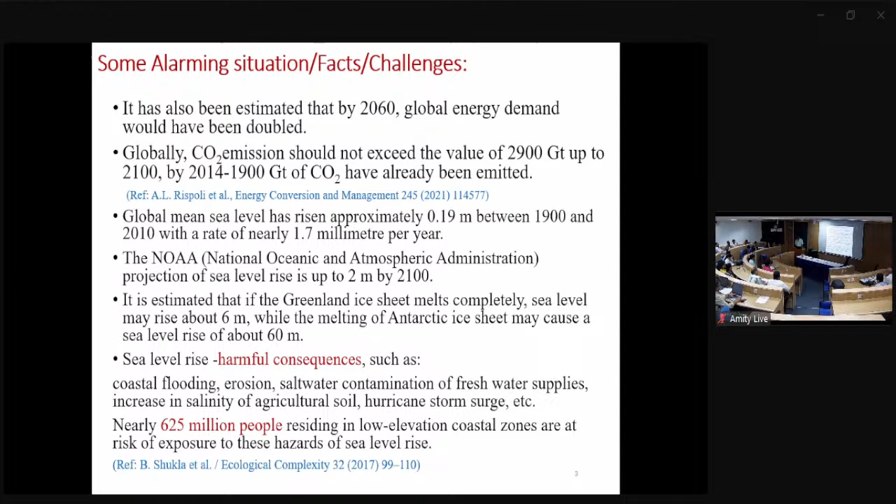This is a very dangerous condition we can face in the coming years because of global warming, and that is only due to our activity where we are emitting this CO2. What is the solution to it?

So please tell me if 30 minutes will be there. Okay.

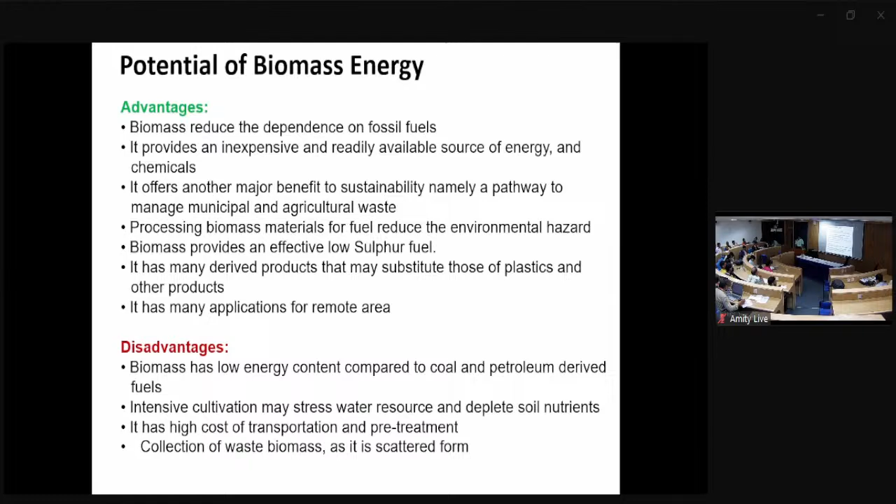So that base is the thermochemical conversion system. So my topic is on gasification. We are not going into hydrothermal liquefaction or pyrolysis. So here what we receive from gasification is called producer gas, and if it is filtered and some impurities are taken out, then this is called syngas.

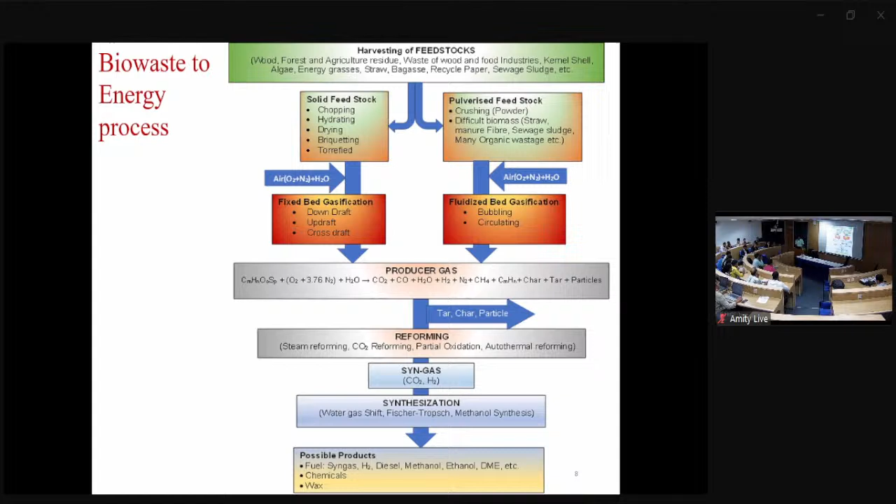So each type of biomass we cannot use. Certain qualities are required. Biomass which has cellulose and hemicellulose content will be beneficial for gasification. So these are the different temperatures. You have to achieve particular temperatures, then only gasification can happen and it will produce the producer gas, otherwise it will burn completely. And there must be certain agents like oxygen, CO2 or steam, and these should be in limited conditions.

So the basic problem of gasification is that on one part heat is required, and partial combustion is also required, where oxygen is in a limited portion. So this achievement is very challenging for the different types of biomass.

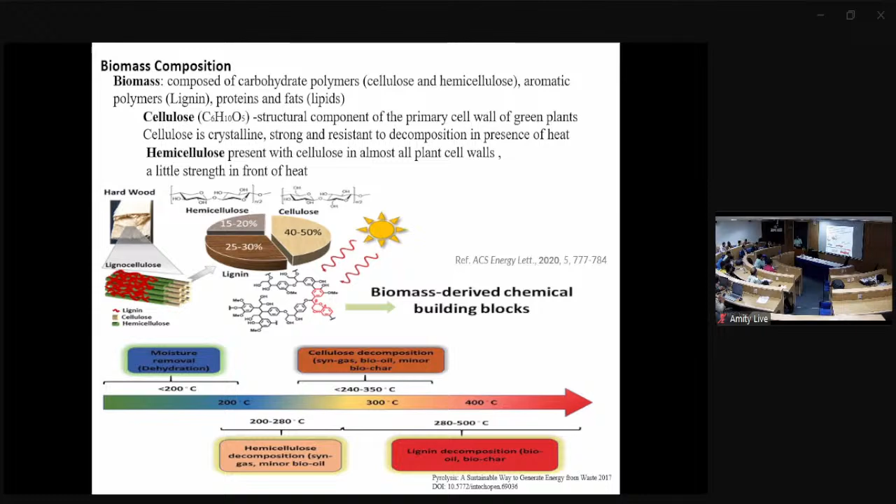For example, a simple leaf coming from the tree has very little volatile matter. So we cannot use it in gasification. But blended with others, it can be utilized.

So this is the basic mechanism of gasification, where heat is taken as an input, and different other gases come when pyrolysis has taken place, and finally CO, CO2, H2O, H2 and CH4, such chemicals as fuel, come out from the gasification.

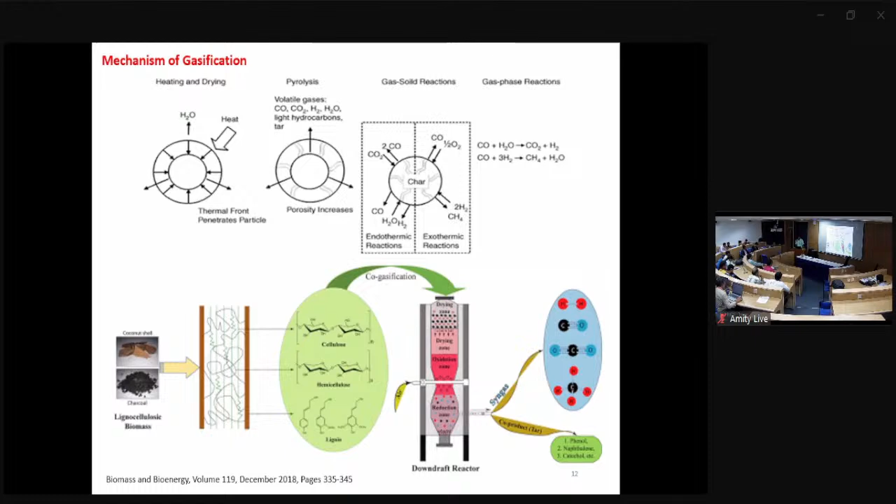And this is the basic chemical structure and the different heat zones in the gasification system. When the material is fed from the upper side, the total gasification system comes under different zones: drying zone, then pyrolysis zone, then oxidation zone, then the reduction zone. The reduction zone basically converts the pyrolyzed fuels into different gaseous forms.

So these are the different reactions. I'm not going into details upon it. Combustion with oxygen, combustion with carbon dioxide, steam reforming, then hydrogen, then water gas shift reactions, and methanation reactions. All these reactions happen inside the gasifier.

These are the different gasifiers: updraft gasifier, downdraft gasifier, circulating type or entrained type gasification systems, as per the requirement and as per the efficiencies concerned.

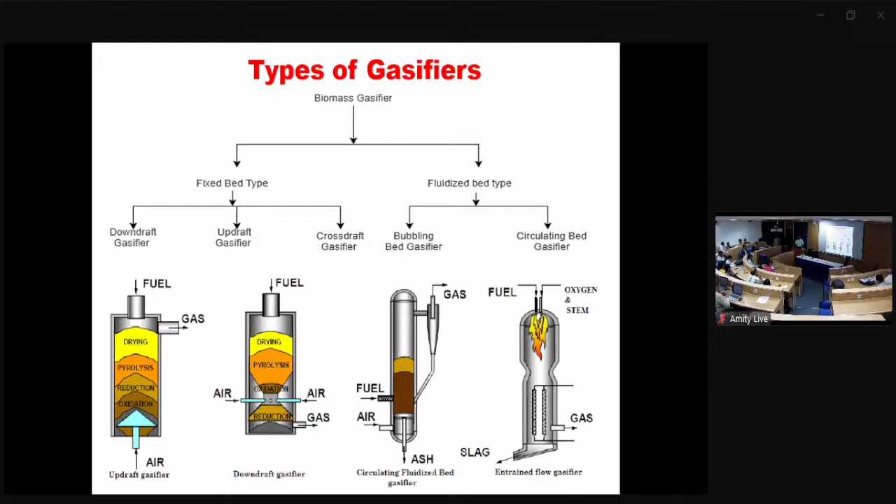The compositions, what are the different compositions that come out corresponding to the different types of gasifier. Gas quality is important - basically when we are going to use it in the engine, then the tar should be very less.

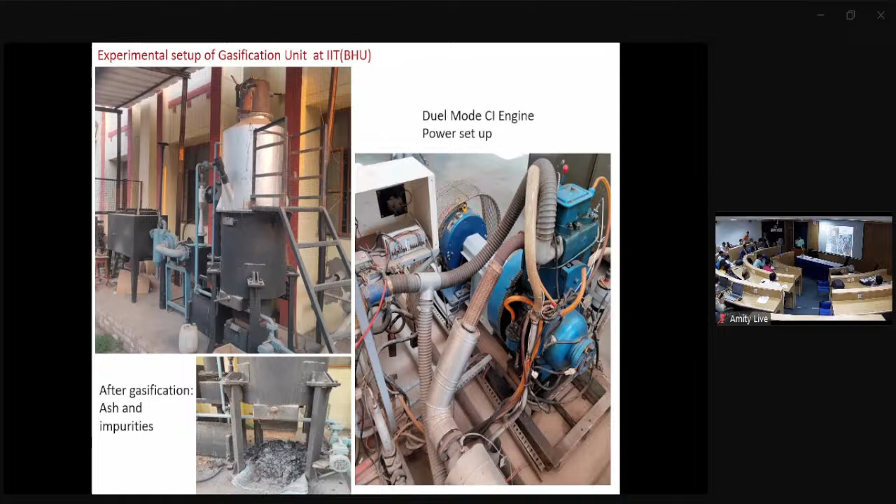First of all, gases we can use in the internal combustion engine. Charcoal - this is very much beneficial for heating purposes, and this is basically smokeless coal or smokeless wood. Another byproduct is ash particles, and this ash can replace nearby 10% of the cement. So this is what we have achieved.

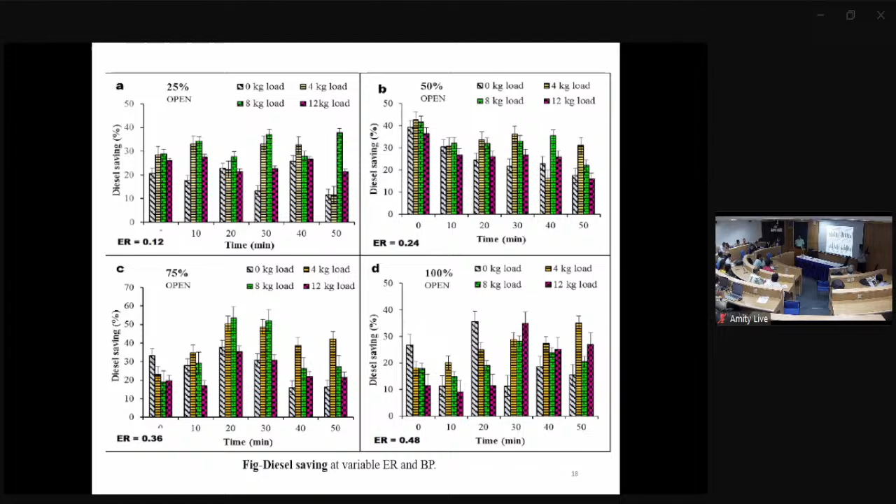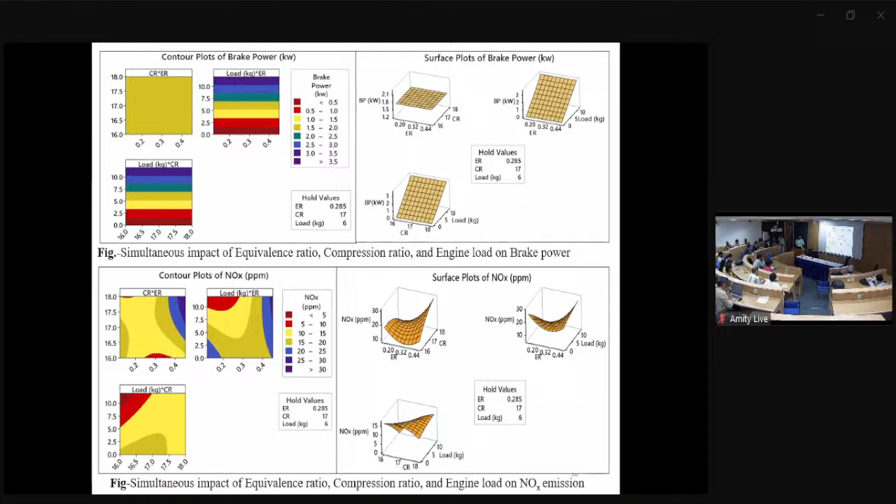These are certain results in terms of brake power and emission level, and we found the NOx emission is also very low, which is very important for saving our environment. For different compression ratios in engines, we experimented and found that at 18 compression ratio, we reached nearby 49.05% diesel saving - basically 50% diesel saved.

These are the different heat balance charts, and we found the optimum conditions of the equivalence ratio in terms of gasification, similar to the emissions from an engine, and corresponding to maximizing power, we received an optimized point shown in red - that is 0.12 equivalence ratio and nearby 17 compression ratio, with load maximized.

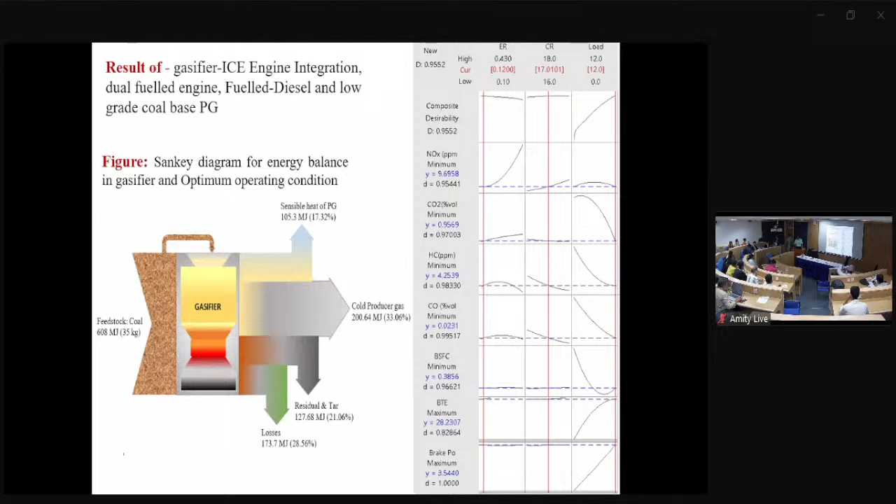Similar results are there in terms of brake power, indicated power, and NOx emissions - the similar results we received are also very beneficial in terms of fuel consumption. So this is a new design that we are working on.

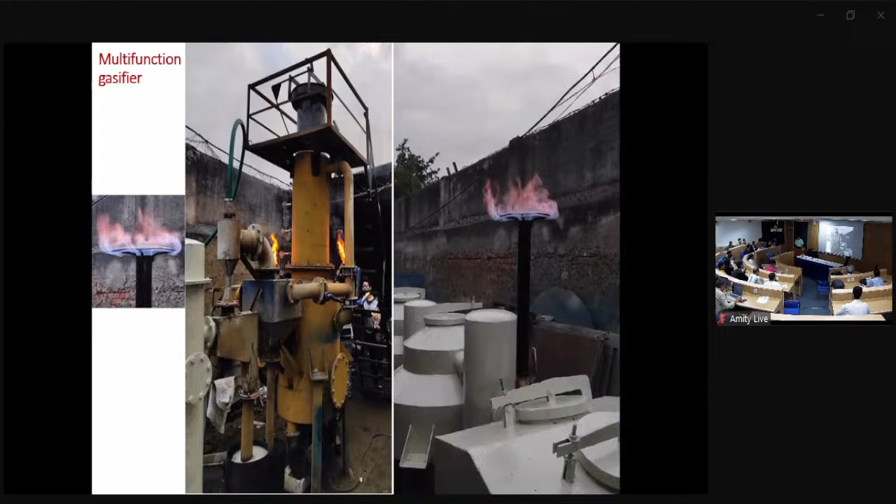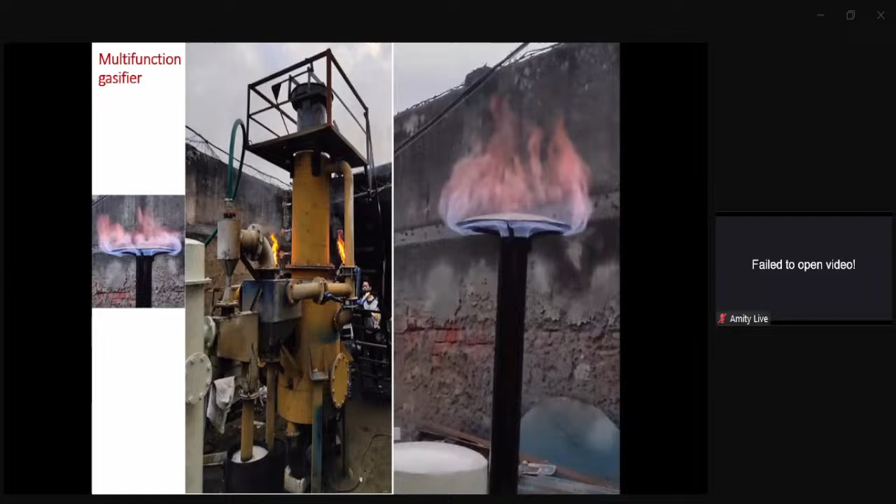Yes, basically in the gasification system, there is no waste. First of all, from the biomass, we are taking out gases.

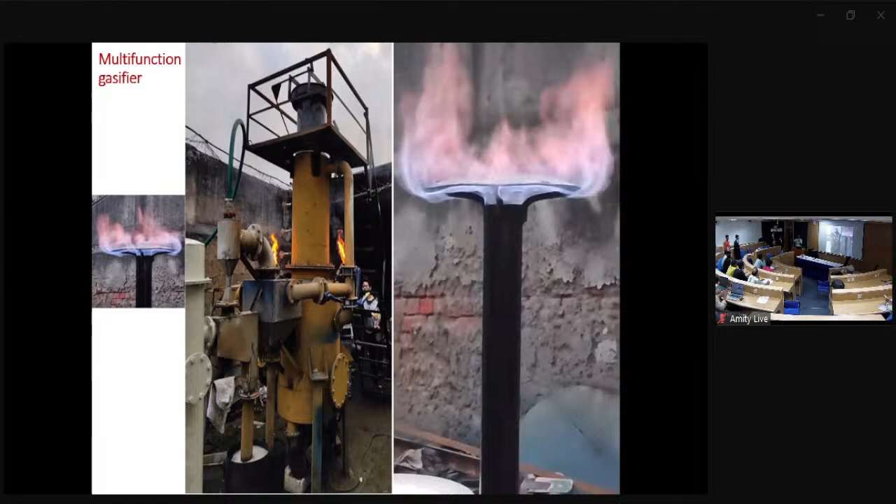So there is no waste. So this is green technology.

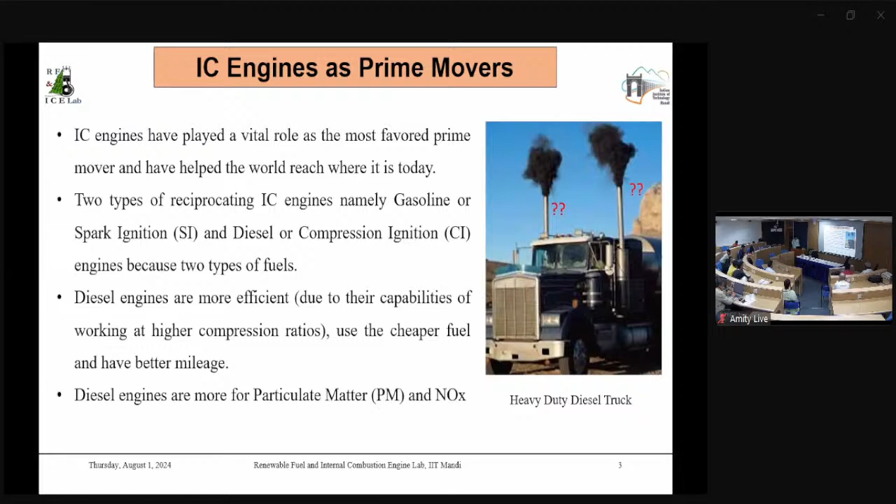So we have to make an effort to shift to clean energy sources, especially for the convenience we are deriving from mobility sources. We have to face the consequences, because for automobiles, these pollutants come in contact with a big population. But for other sources like power plants, we may have the luxury that we can emit in sparsely populated areas and discharge in the upper portion of the atmosphere. But for automobiles, it has to be ultra clean.

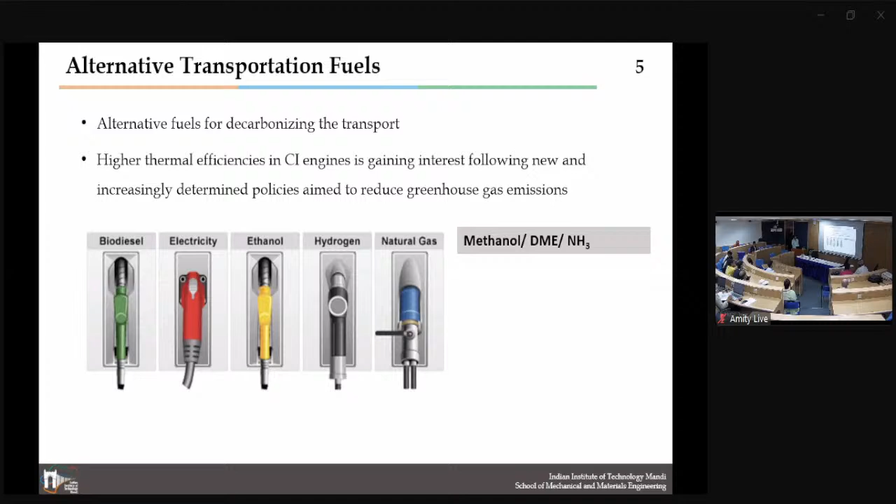And hydrogen, of course there are many demonstration projects, but there are questions about long-term supply and storage issues. And then there are some future fuels like methanol, DME, and NH3 that we are targeting as a strategic mix for powering our transport.

So in the volume and weight that power sources like hydrogen and large scale electric vehicle battery storage are going to occupy, they have the same level of energy storage density. That is the major reason that in the data, the penetration of EVs in commercial and bigger vehicles is almost zero. But of course, we see some positivity for electric vehicle based alternate transport in terms of smaller vehicles.

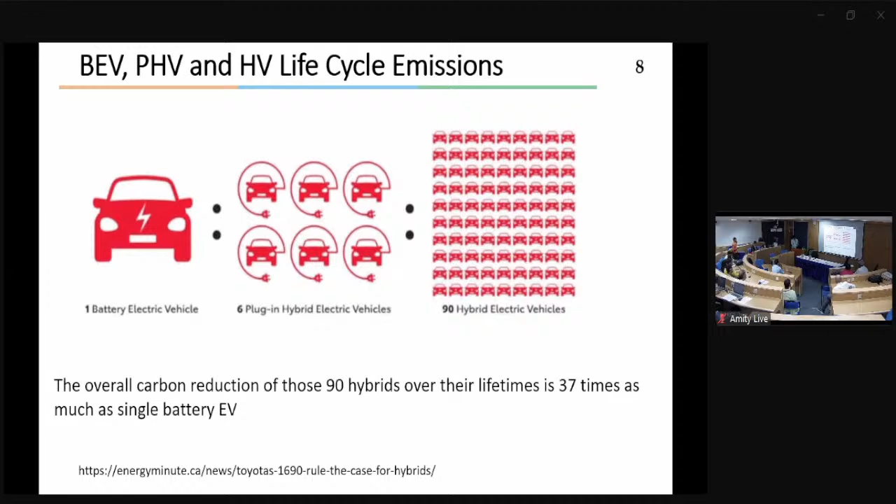And if we have to strategically plan the alternate transport scenario, there are some studies which show that hybrid vehicles are going to be the greenest strategy compared to 100% electricity. But in the interest of time, I will not discuss that in much detail. So then coming to the original issue. There is also equal promise for hydrogen based powering of the transport sector, but the supply situation is not very promising for hydrogen. So as an intermediate transition strategy, as a bridging strategy, what advantages we can derive from H2 diesel dual fuel engines, that I am going to discuss.

So these data show what happens if an engine is operated with up to 30% hydrogen energy substitution and the rest of the energy coming from diesel. What is the effect on in-cylinder pressure as a causal parameter, and then what is the effect on emissions and performance, that I will quickly show.

So it shows that if an engine designed for diesel substitutes up to 30% hydrogen, and for NOx mitigation 10% exhaust gas is also supplied along with the intake air, then bigger fluctuations are observed in the peak pressure compared to diesel-only application.

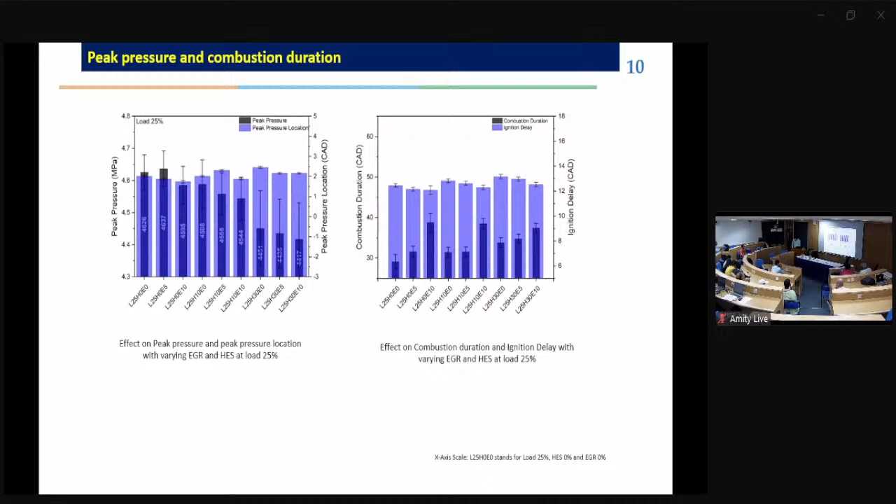So what is the effect of this small fluctuation in cylinder pressure? For any powertrain, we are sensitive to the vibration experienced on the engine, which is ultimately transmitted to the user as more or less vibration felt while riding the vehicle. So it makes sense to quantify the effect of the change of fuel on the vibrations produced on the powertrain.

By this differential method, the effect of hydrogen substitution in the diesel engine was measured. It shows a small vibration increment when putting 30% hydrogen at 100% load compared to diesel-only operation.

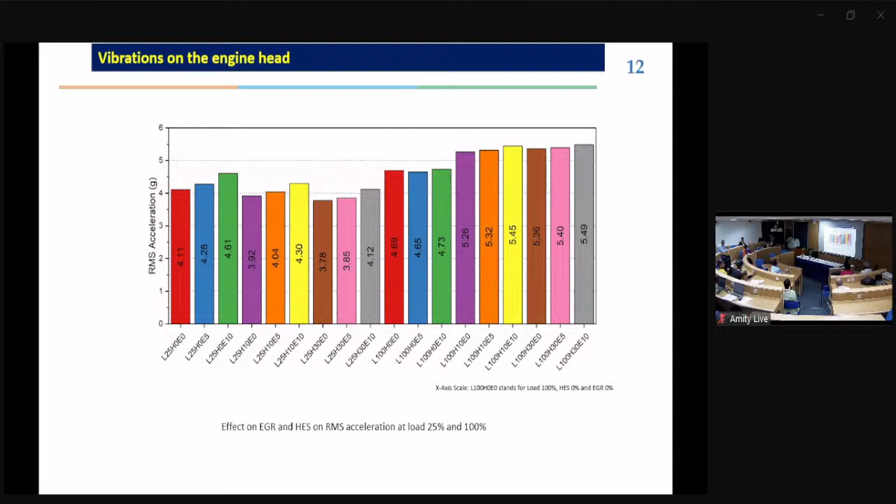So in terms of fluctuations in peak pressure and the associated vibration increase, at least these two challenges we have identified. That's why we need to identify the maximum portion of hydrogen substitution that produces a tolerable effect. Based on the peak pressure coefficient of variation, 20% or 30% substitution appeared acceptable.

Next was to see the effect of this hydrogen substitution on major pollutants. To interpret these studies: in the best case, if we substituted 30% diesel with 30% hydrogen, then more than 30% reduction in pollutants would show a synergistic effect beyond just material substitution of fossil fuel with pure hydrogen. So it's better to interpret the cumulative effect on various pollutants.

In a well-optimized strategy, there was about 35% reduction in NOx with the synergy of hydrogen and substitution of some exhaust gas. But because this engine was designed for diesel-only operation, 30% hydrogen substitution resulted in only 21% reduction in CO2, showing further scope for optimizing the engine for diesel-hydrogen mixtures. CO reduction was almost 30%, actual value 27%.

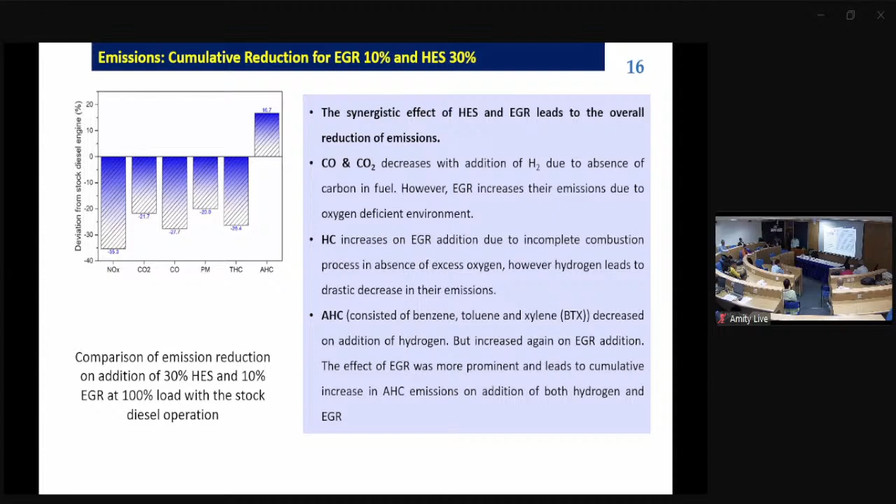So while seeing some pollution-related advantages from this co-substitution, the next thing is, as we know there are significant challenges in generating hydrogen. What is the possibility of onboard generation of a small amount of hydrogen through exhaust heat recovery on the vehicle itself? I will quickly show a few options for exhaust heat recovery and the strategies required for converting at least a fraction of that recovered heat into hydrogen.

Generally for automobile application, three routes are most prominent. The first is the turbo generator, meaning an extra turbocharger needs to be put apart from the one compressing the intake air. The second route is the thermoelectric generator.

So on the exhaust line, specific materials which, when subjected to a thermal gradient, produce electricity. If they are put on the exhaust line and the outer surface is properly cooled, then we can generate some small amount of electricity.

And the third route is suited for bigger vehicles like trucks and locomotive applications. There we can afford to install an even more complex system named an organic Rankine cycle based system. Among these three systems, system complexity keeps on increasing as we move from the turbo generator to the organic Rankine cycle, but in the same proportion their typical efficiencies also keep on increasing.

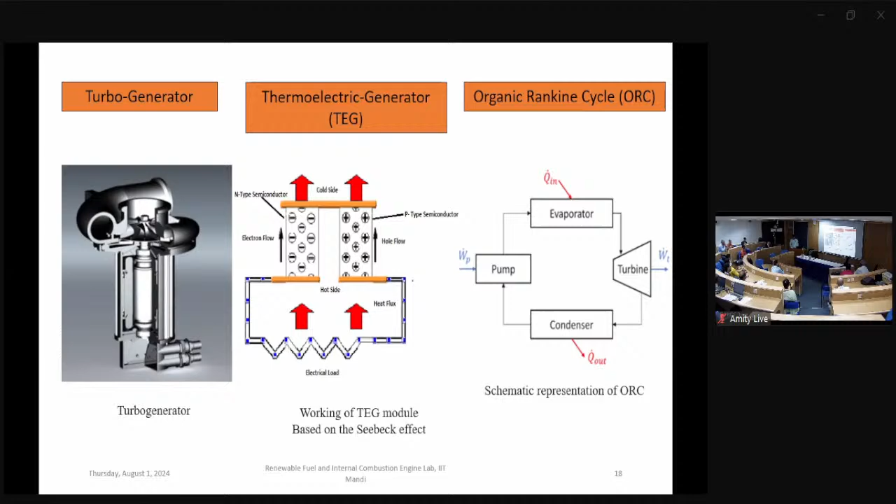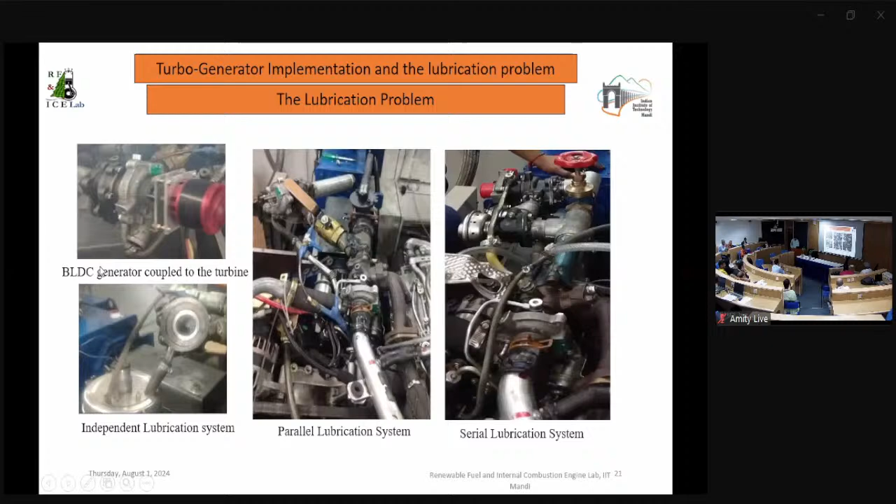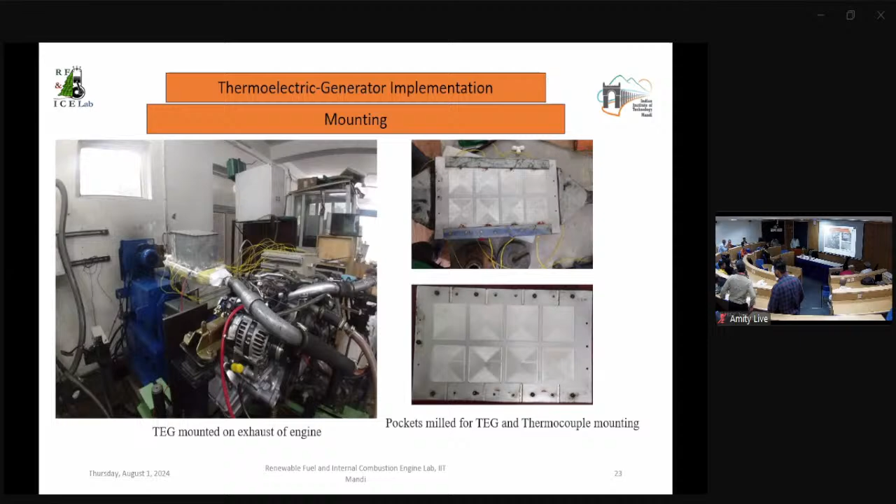So then quickly I will also mention the prototyping effort of the thermoelectric generator based implementation. Some muffler-like heat exchanger arrangement needs to be installed in the exhaust line, and these thermoelectric generators need to be provided heat absorbing surfaces, and as I was mentioning, the temperature gradient is the source of electricity production in the thermoelectric generator. So the other surface needs to be cooled. For reliable cooling, we need to either flow some liquid, or we can have some PCM based temperature control.

So it is showing the actual installation of that component in the left side diagram, and here it shows that because there are multiple small units of thermoelectric generator, for any meaningful power collection, some electrical circuit needs to be designed to feed the power from multiple small generators.

In this case, because the system is simpler, it was deployed for a longer duration, and the power output was measured by drawing the current. This prototype was able to generate up to 50 watts, and this shows that if this system can be scaled up, it can generate a significant amount of hydrogen.

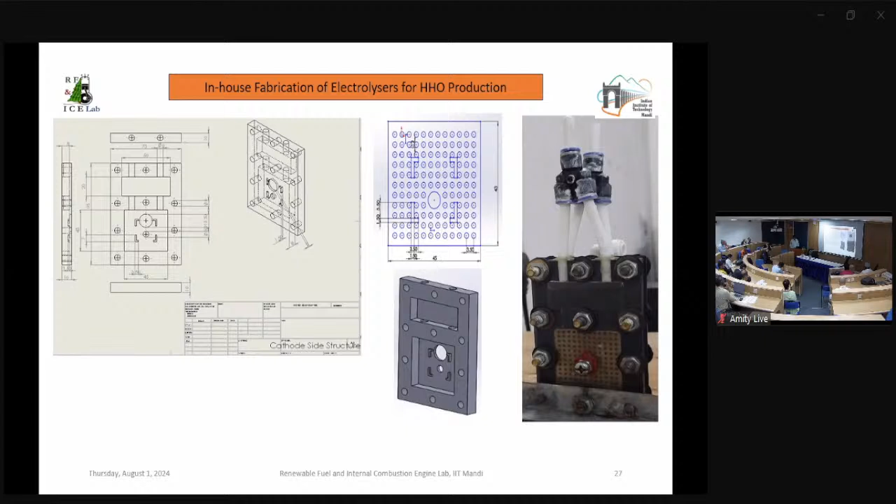But fortunately, in this particular operation, even if we are feeding pure oxygen along with the hydrogen, that is expected to help in the combustion. So the requirement of segregating hydrogen and oxygen was not compulsory. With that flexibility, these electrolyzers were constructed using nickel and stainless steel as the anode and cathode respectively.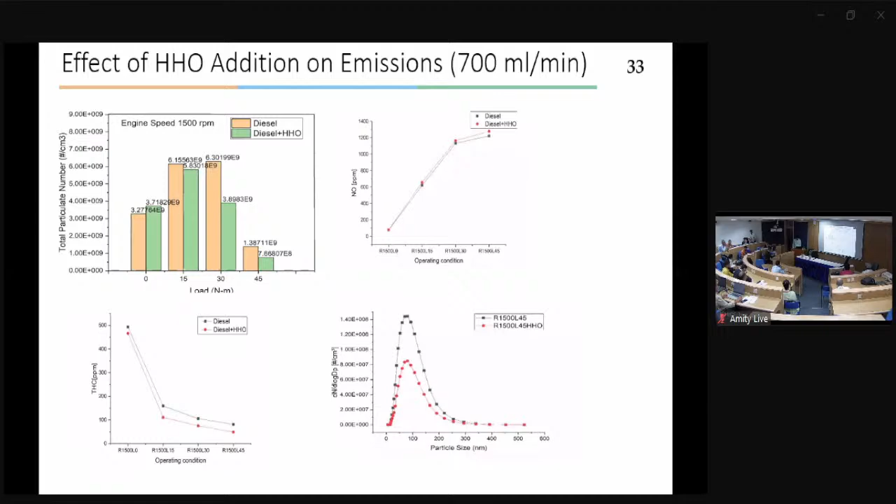And there was almost the same amount of NO production, and this HHO fumigation was also helpful in total hydrocarbon emission reduction. Okay, so then in the summary, I will just say that I discussed the possible advantages of a small amount of hydrogen combustion along with the diesel, and some pathway for this onboard production of the hydrogen.

So whenever we are running a bike, the bike should give 80, 90 average. And bikes are generally petrol engines. So my concern is if we are adding it, what will be the effect, and then it will benefit most Indians, not only the businessmen for trucks and heavy duties.

In the scenario of petrol engines, if there is any amount of hydrogen available, there is certainly going to be further reduction of the pollutants, as well as some improvement in performance. But of course, at the level of motorbikes, there will be some additional system complexity. I hope you might have heard that recently some automobile manufacturers have done the CNG one.

For CNG, storage is less challenging, but having hydrogen storage on bikes, there is doubt that users will accept the excess storage space of the hydrogen cylinder. But if there is something like this onboard generation concept, even the prototype systems I was showing were quite bulky. No bike user is going to accept that currently. If they become compact, say in 5 years, it may be possible.

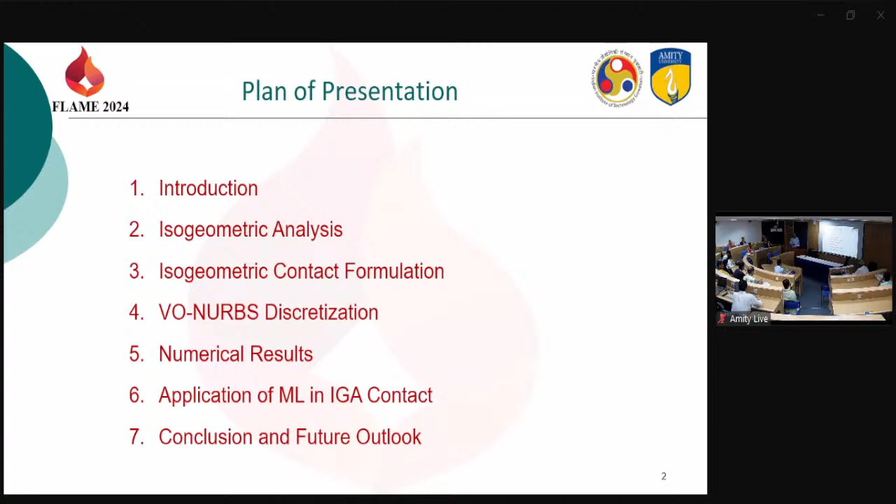So starting, we have a few topics: some introduction to isogeometric analysis, contact formulation, the discretization scheme that we proposed recently, some results, some application of machine learning in IGA contact, and then we'll conclude.

So this is our lab. It primarily focuses on large scale contact and small scale gecko simulation, adhesive contact, so that's nano scale, and we've been funded a lot by SERB, VSSC. Recently, we have a project from ARDB for machine learning applications. We have collaboration with Cummins and Professor Sauer from RWTH. Now he's in another university.

So these contact problems occur a lot in nature. You have car crash simulations, tire simulations, soil foundation interaction simulations. At small scale, you have gecko contact. You know all these lizards walking on the wall. They use this multi-scale adhesive contact to walk on the wall. With this, you can design robots. People have designed robotics out of that.

And you have biomechanical applications. So a lot of these applications are there. Other than that, you have sheet metal, gear, all these kinds of simulations where you need precise simulation of the contact.

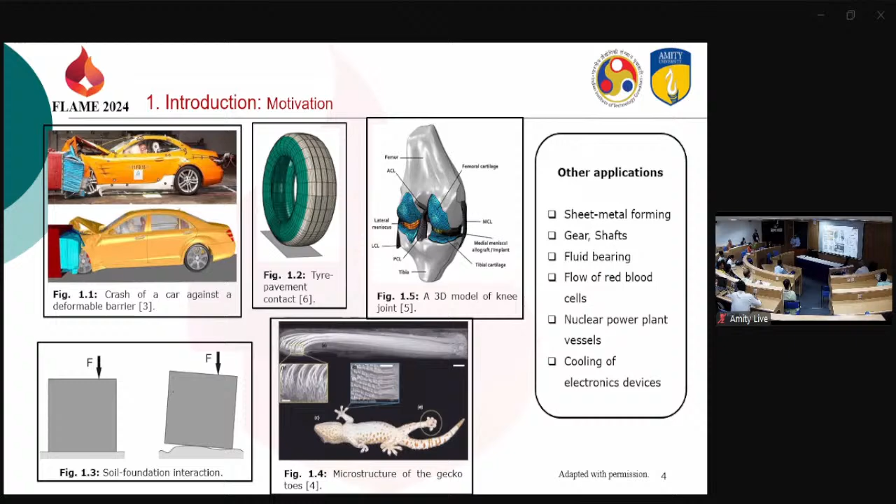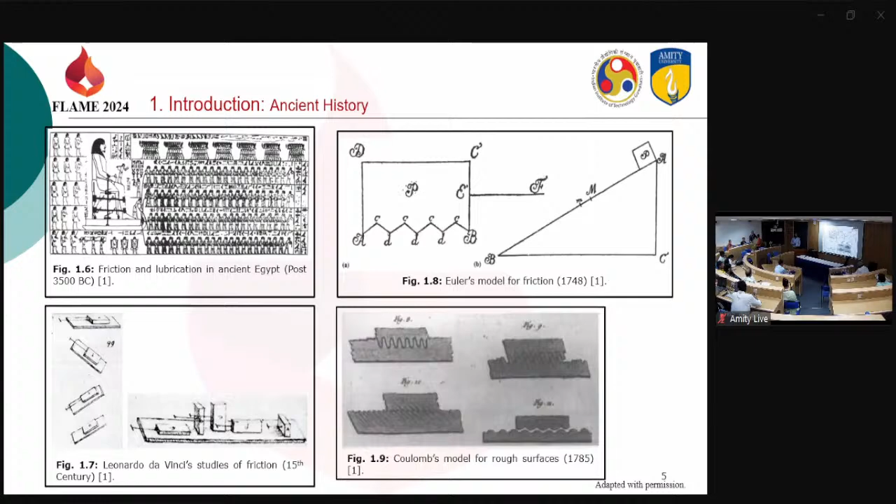So this is the ancient history. Egyptians used their understanding of the contact problem to make pyramids. And then Leonardo da Vinci had a certain understanding. Euler had a certain understanding of friction. So these were the earlier works, what's called ancient history. And in modern history, I started with the Hertz contact problem, 1882, well known.

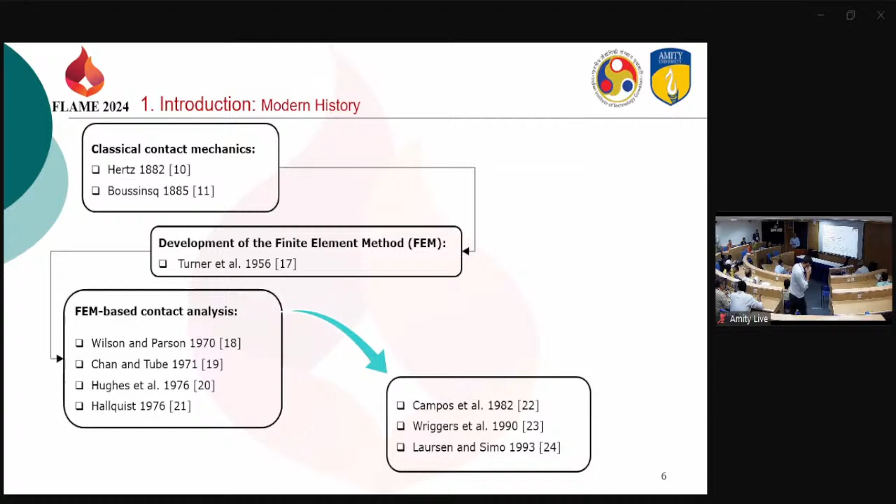And then in 1956, Turner came up with the finite element method, and that led to the start of simulation-based work in contact problems. That started with Wilson and Parson, and then a lot of these people worked in contact problems. A lot of the novel contact simulations which you find in finite element software were developed in the last century. Now what happened recently, I'll go on.

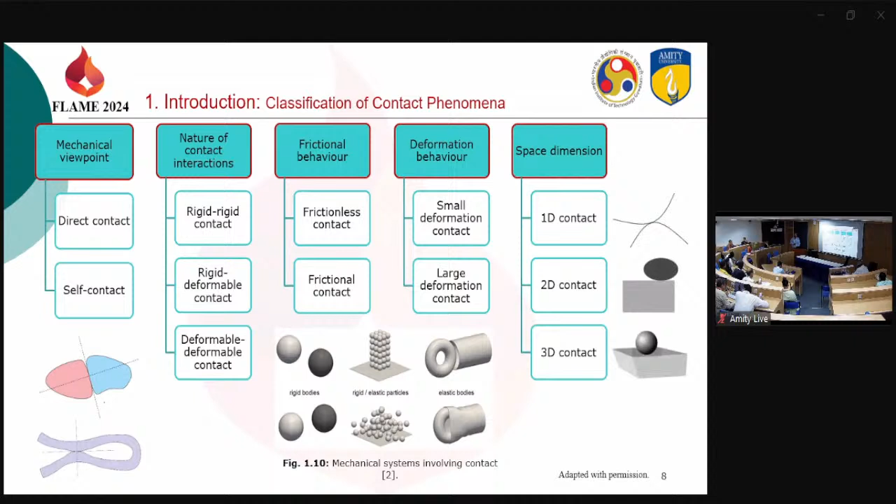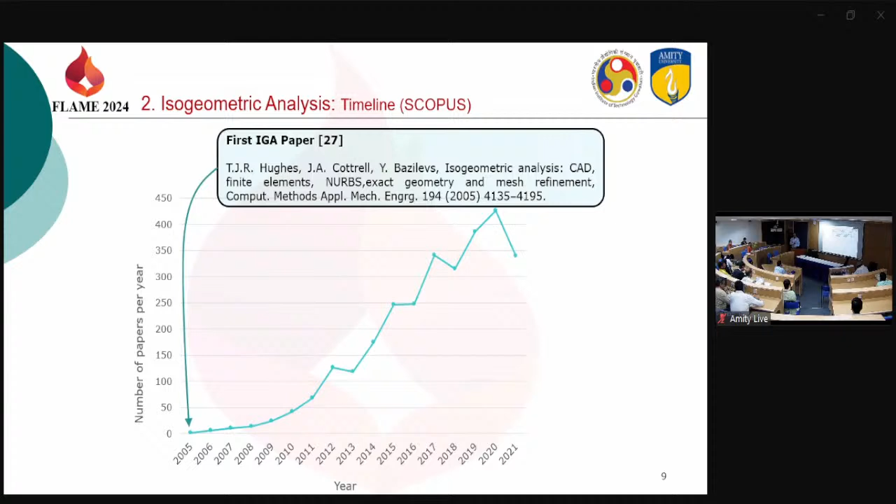Isogeometric analysis, coming to it: the first paper came out in 2005, and since then there has been an exponential increase in the number of papers. This is only till 2021, because that was the slide of my PhD student for the state of the art. You can see that from the first paper to 2021, there are 400, 500 papers in isogeometric analysis. That's the first work that came out from the group of Hughes.

So what is IGA? IGA is a unification of CAD and finite element analysis. People who have done finite element analysis will realize that you first model the geometry, take it into a finite element mesher like HyperMesh, and then import that into a finite element solver. So there is a certain idealization in each and every step. You make a CAD geometry, then you approximate, and then you use your solver like ANSYS to do the simulation. So that's your finite element analysis.

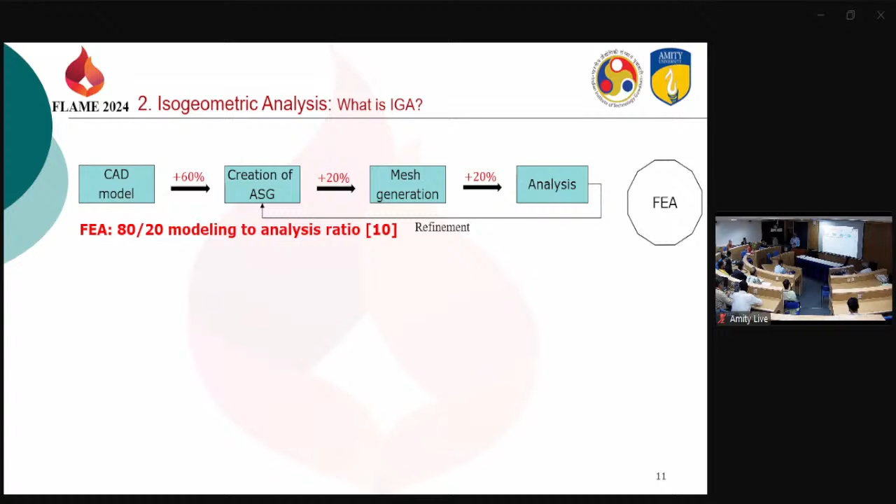Okay, so this is a slide which is data taken from Hughes. In traditional finite element analysis, approximately 80% of the time is taken till mesh generation. Solver only takes around 20% of the time. So 80% is a lot of time for companies to invest.

That's where isogeometric analysis comes in. It tries to combine the CAD engineers with the finite element analysis, so that this 80% of the time can get reduced. Obviously, there are some bottlenecks still existing, but the idea is you can have geometric error-free simulation, and the computational time for simulation can be reduced.

So what are the advantages? You have accurate simulation, which are robust, efficient, and because of local refinement, you can easily incorporate adaptivity.

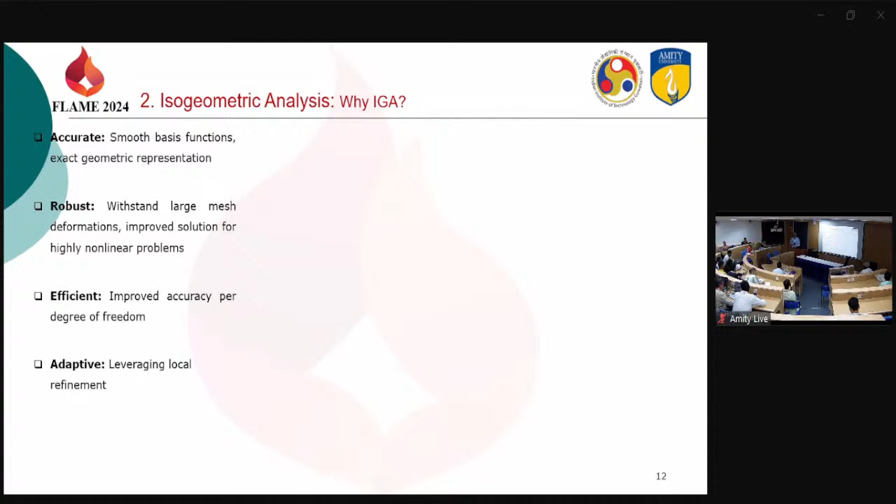In terms of resources, you can see here, for example, in isogeometric analysis, what you achieve in around 50,000 degrees of freedom, traditional finite element will take around 1 million degrees of freedom. So that's a reduction in the computational effort - a significant advantage you have in isogeometric analysis.

So it's becoming very popular. A lot of industries are using it. LS Dyna, for example, has incorporated IGA and they're working into it. Companies like Mahindra want to explore it, but the problem is it requires a lot of expertise to work into.

What are the challenges in traditional contact analysis? You will have non-physical oscillation because you have approximate geometry, high stress concentration which are not physical at the contact zone, and contact detection also is a big problem.

So what is the solution? You can either do smoothing of the contact surface - it's a well-established strategy in finite element analysis - or you can have P refinement, a higher order refinement.

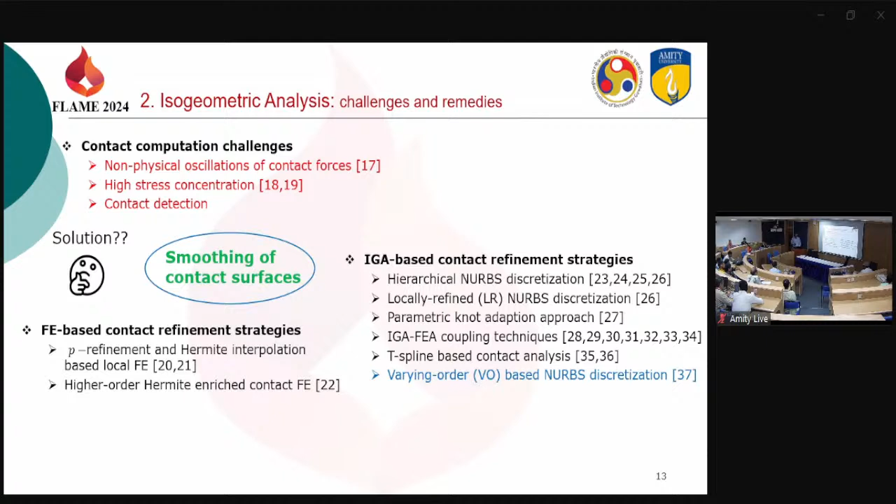In IGA, there are various refinement strategies which can be used, and we have done some comparative study of various refinement strategies in one of our recent papers. I'm skipping all the review part - if you are interested, you can see our recent paper in Archives of Computational Methods in Engineering, which totally deals with isogeometric contact problems review.

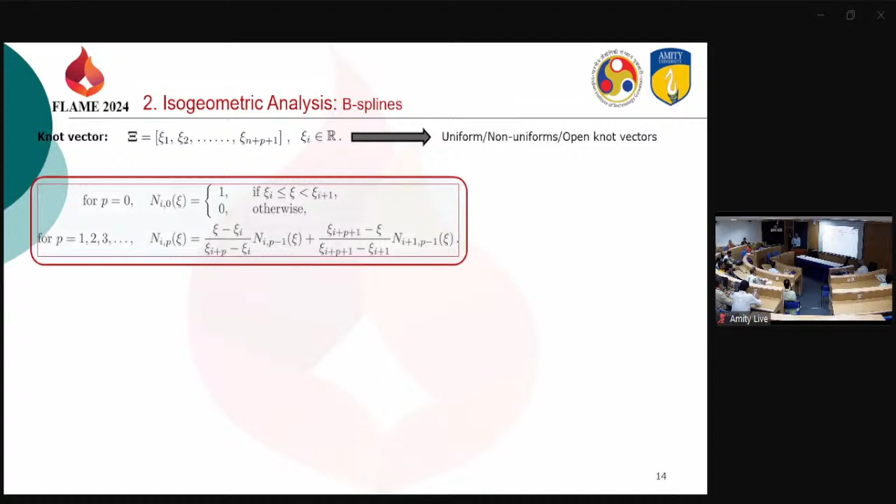So I'll skip all this B-spline background. The idea of B-spline basically is that you have a knot vector, and with this knot vector, you can generate what are called spline functions. Recursively you can use the Cox-de-Boor recursion formula to generate these functions, and then you can generate higher order functions with repeating knots.

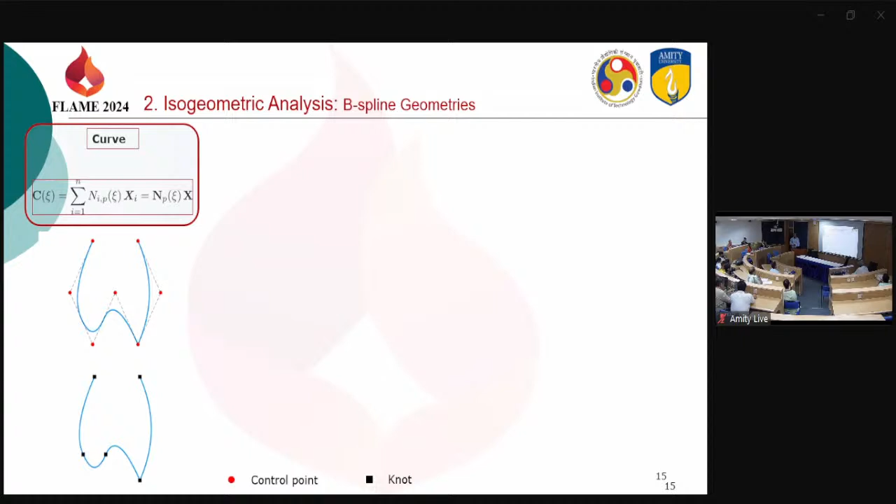So the main features are here - you will still have the partition of unity property in B-spline functions, so you can represent complex curves. These red points are basically your control points, black points are basically your knot vector locations. You can represent curves, surfaces, and solids, which you can construct using B-splines.

But one of the disadvantages is you cannot have conics, which you cannot construct using B-spline, for which you need to use NURBS basis functions. Using NURBS basis functions, you can represent conic sections.

What the idea is, apart from your basis function, you also utilize weights. That's how you get this term non-uniform rational B-spline, because each control point has different weights, so which is not uniform.

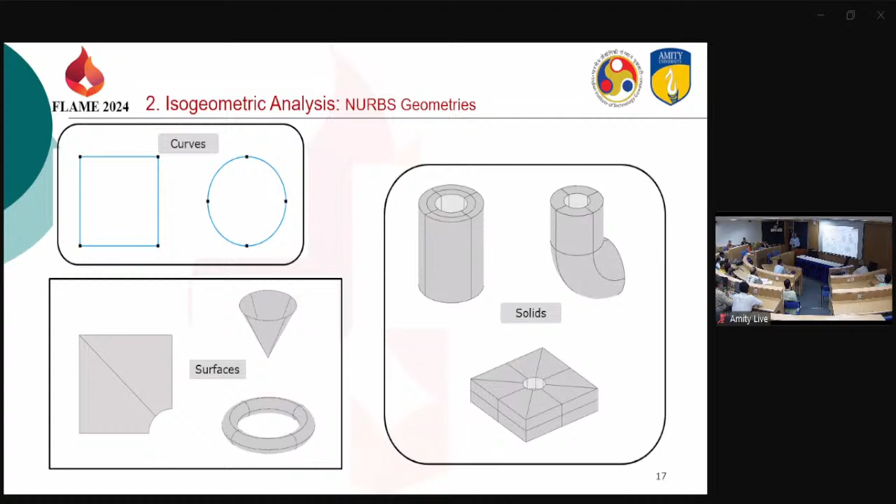And these NURBS are basically utilized in isogeometric analysis. So here you can have curves, conic sections, which are not possible in traditional B-splines. You can have 2D, 3D, all kinds of complex geometries that you can model for analysis.

From the context of refinement, there are different refinement strategies analogous to finite element analysis. You can have knot insertion, which is like inserting new nodes in finite element - like in finite element you insert new elements, so that is akin to knot insertion in isogeometric analysis. You can also elevate the order of the basis functions.

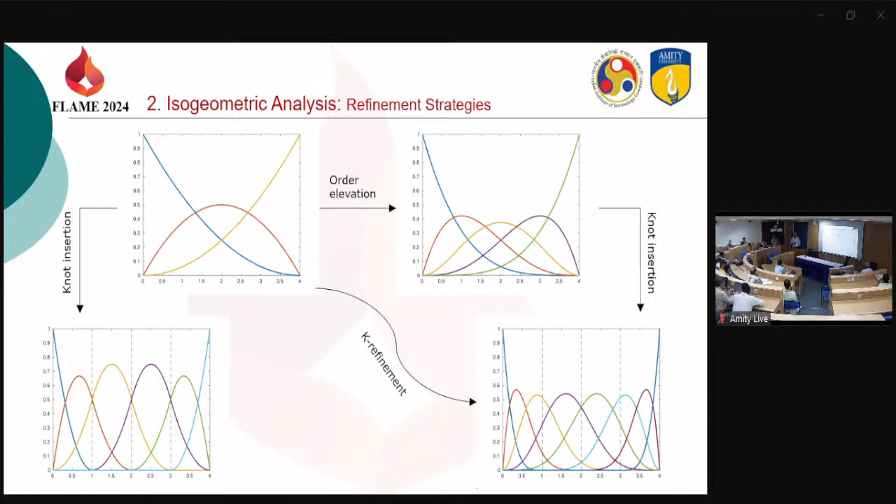Then you can do knot insertion to get what is called K refinement. K refinement is not existing in finite element analysis. This K refinement is what we use in our simulations for contact problems.

So the idea, one of the key ideas which separates isogeometric analysis and finite element analysis is, in finite element, the parameter space - xi, eta, zeta - the parameter space is local to every individual element.

Each element will have its own parameter space, but in isogeometric analysis, the parameter space is local to an entire patch. So in isogeometric analysis we work in patches, a patch of elements - like two elements in one direction, one in another, and three in another direction. This patch is what isogeometric analysis deals with, while FEM basically deals with one element at a time. That's the key idea.

Your mechanical boundary value problem has to be augmented with contact constraints when you try to implement it, and what you get is the contact boundary value problem. So you convert it, as you do in nonlinear finite element method - take the strong form, convert it into a weak form, and then do isogeometric discretization. You get a system of nonlinear equations which you solve iteratively using the Newton-Raphson scheme or any iterative scheme.

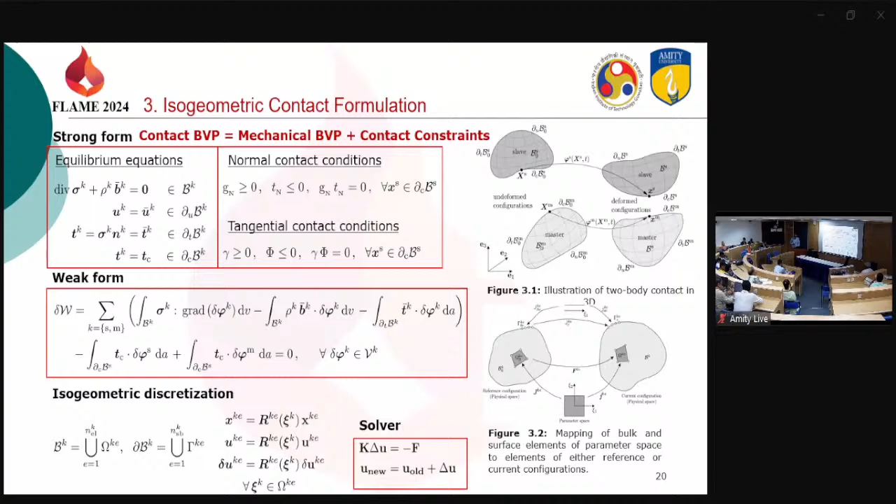How do you implement this constraint, which has to be in both the normal and tangential direction? You have different kinds of formulations existing, and you have to implement that at the contact point. I'm skipping that here because half an hour is not sufficient for it.

That's our idea that we published in 2020 in Computer Methods in Applied Mechanics and Engineering, called the VO NURBS discretization. Contact is a surface phenomenon, so what you need is something which is not going on in the bulk but happens only at the surface.

If you want to refine - basically in isogeometric analysis, the unknowns are at the control point, just like in finite element method your unknowns are at the nodes. But in isogeometric analysis, you can have control points which are located outside the geometry.

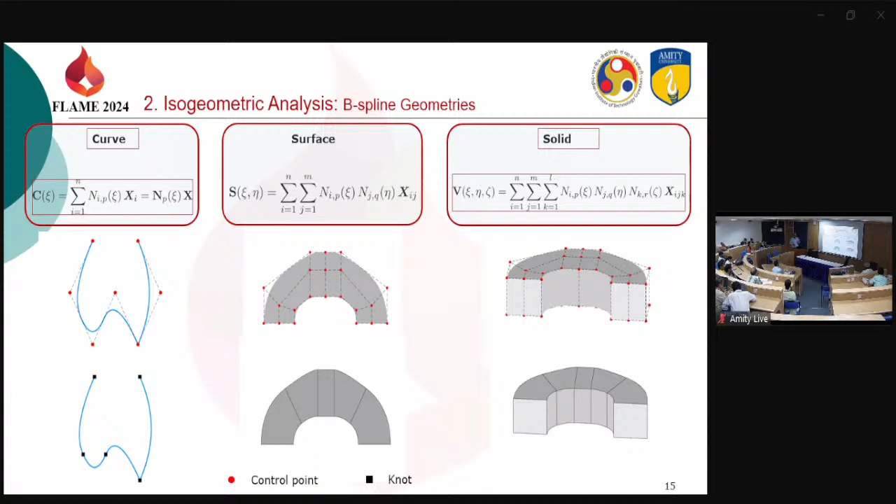Let me go back and show you this picture again, just to make it clear. You see here, this is your geometry, but the control points lie outside the geometry. In finite element method, the nodes will always lie on the geometry, but here the control points lie outside. And the unknowns are at the control points in isogeometric analysis.

If you want to do refinement, because of the tensor product nature of NURBS, if you do refinement at one surface, that will be reflected all over the domain, which is not required. We want refinement only at the surface, not in the bulk, because that's where contact happens.

The more control points you have, the more accurate your results would be. So that's where we came up with the variable order NURBS discretization strategy, where we could generate more control points only at the surface, not disturbing the number of control points in the bulk.

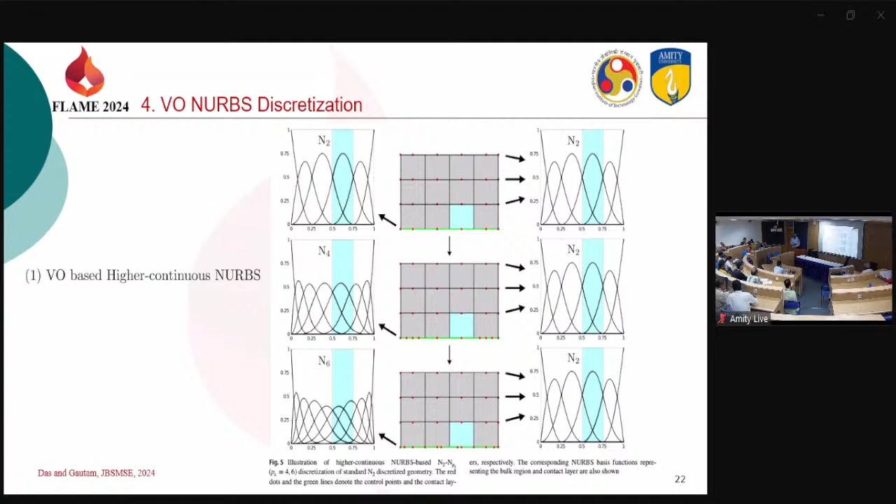We had two different strategies. One was called the higher continuous NURBS. You can refer to this paper, our recent paper, where we have given all this in detail. I'm skipping here because time is less.

And we have higher order discretization - there are two different strategies we had. With these strategies, we found out eventually that we get much more accurate results in much lesser time compared to if you do uniform refinement, which consists of the bulk also.

As a summary, these VO NURBS are used only at the contact layer, and a large number of degrees of freedom can be introduced without affecting the mesh. The number of control points always increases only by a slight amount.

I'll just skip that. So these VO NURBS have the non-negative property that the value of the shape function never goes less than zero, unlike in finite element method where it can go negative in certain parts of the elements. We also have the partition of unity property, which is essential to represent rigid body motions.

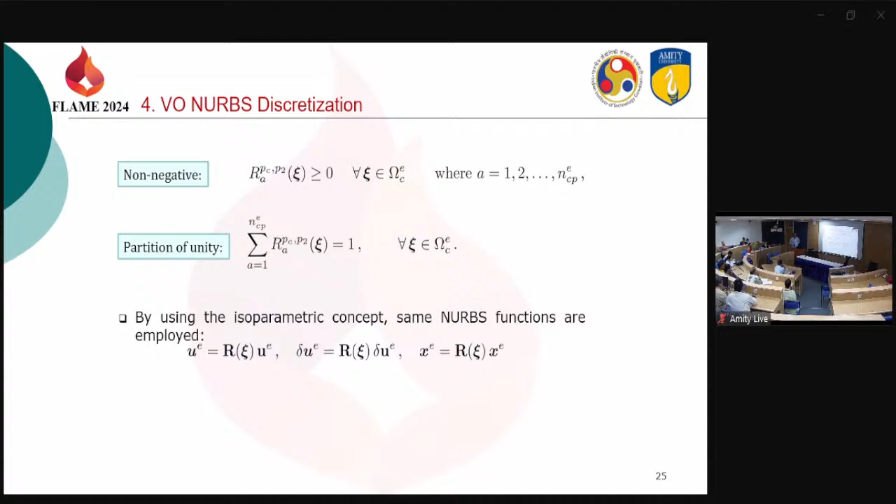Using this isoparametric concept and using NURBS as a shape function, you can use the same strategy for approximating the displacement inside an element. This R is where your NURBS basis function rests, unlike in FEM where you have the Lagrange shape functions.

For 3 dimensions, I'll just skip all those. Coming to the results - whenever you develop any new strategy in simulation, the first thing you have to do is validate your findings. So we started with validating the 2D Hertzian contact problem, which is a very standard problem.

It looks very easy, but it's extremely tough to do. In all those NAFEMS benchmark manuals you'll find this as the first problem. So if you can really simulate this, this is the result that you want to simulate - a 2D small deformation problem.

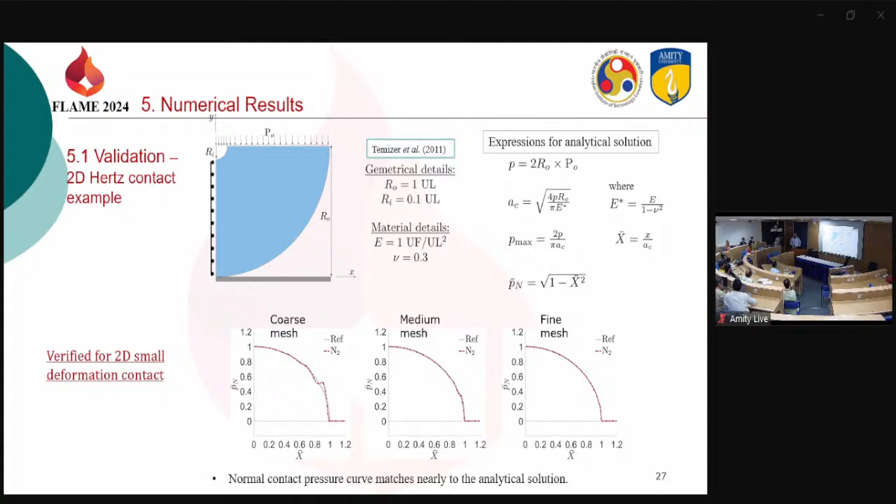And you can see with this coarse mesh and fine mesh, we can get the reference results very easily.

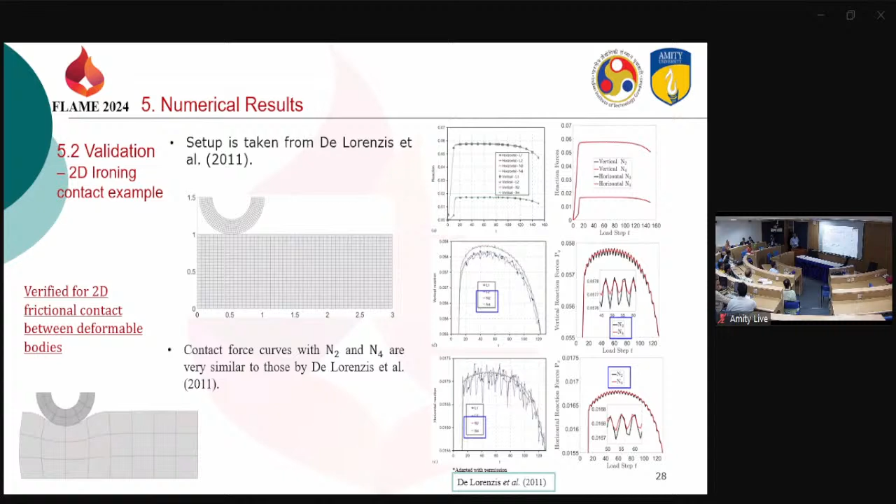Okay, so that validated. We then went to two-body deformable problem. This is a die slab contact problem. This is the literature result, and this is what we got. We found that our results are coming similar to these reference results. So that's how the simulation goes. It's a large deformation problem.

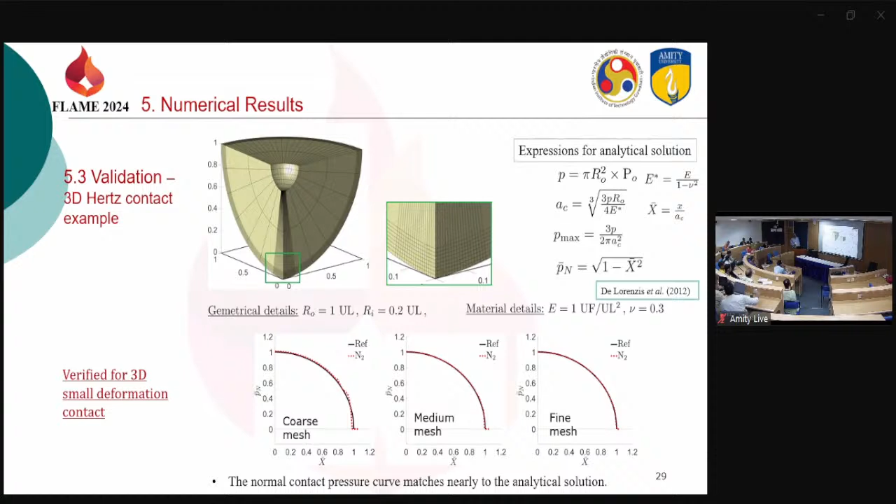Then we move to 3D Hertz contact problem, the same problem as 2D, but now done in 3D. And again, we found that this 3D isogeometric contact results from the reference, the Hertz analytical results, and our results match very well.

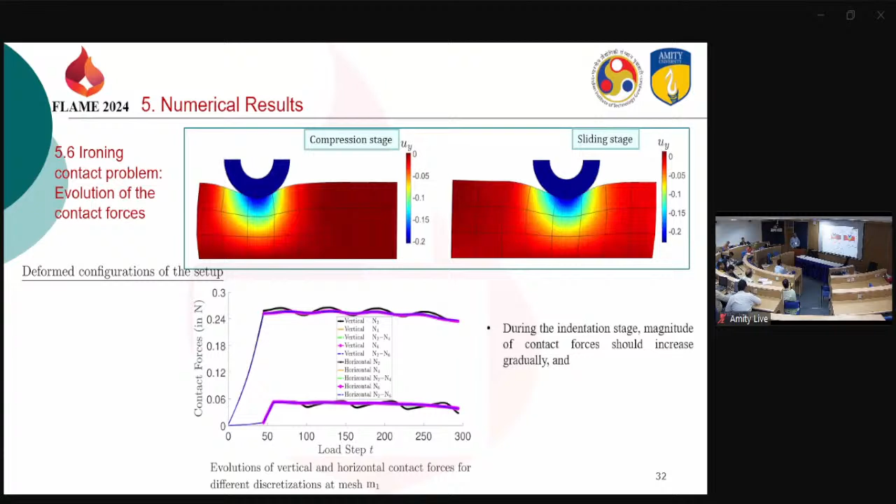This is a 2D problem, this 2D ironing problem. You can clearly see these oscillations can reduce significantly. So I'll skip all those.

We also had second order convergence. Whenever you have a simulation strategy, how your results converge to the exact solution should ideally be quadratic, which means if it's not quadratic, there is some error in your formulation. We had quadratic convergence in all our results. So I'll just skip all those.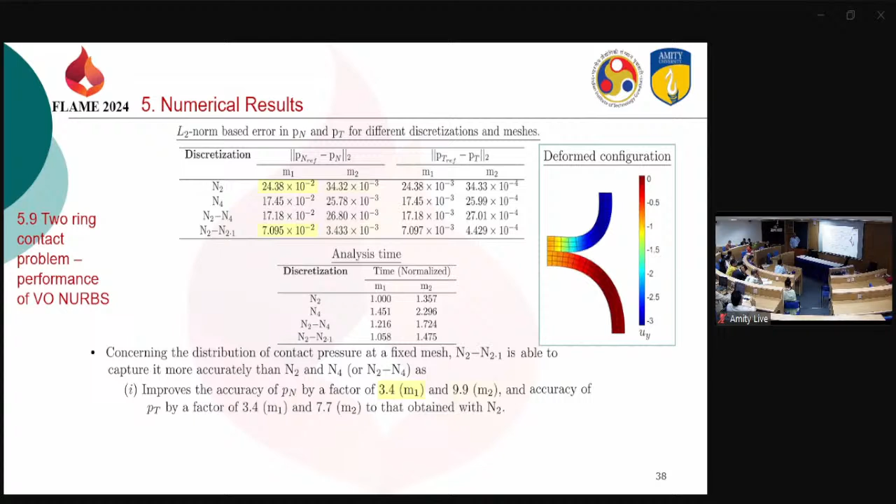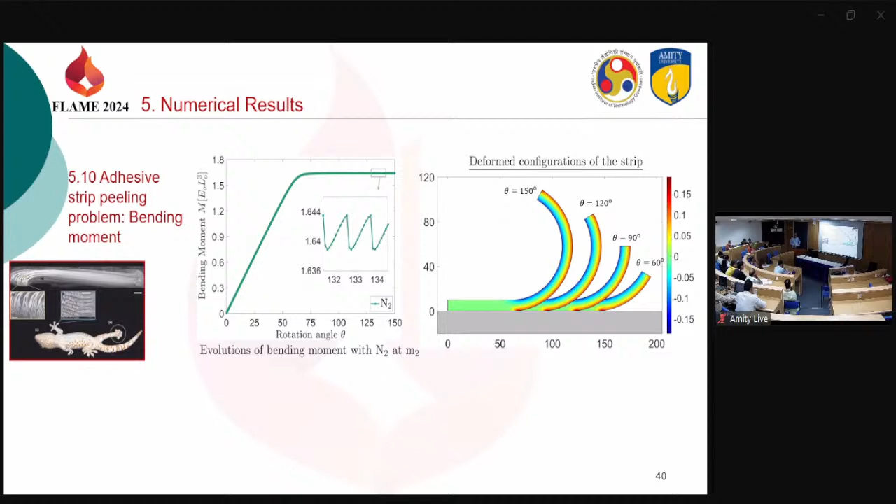I'll just skip all this. We also tried an adhesive contact problem, a nanoscale contact problem. We modeled this gecko's spatula as a strip, and we peeled that off from a surface by applying angular moment. Here also we considered van der Waals adhesion. We found that with our conventional approach, the oscillation again went down. We got very good results, and results converged quadratically.

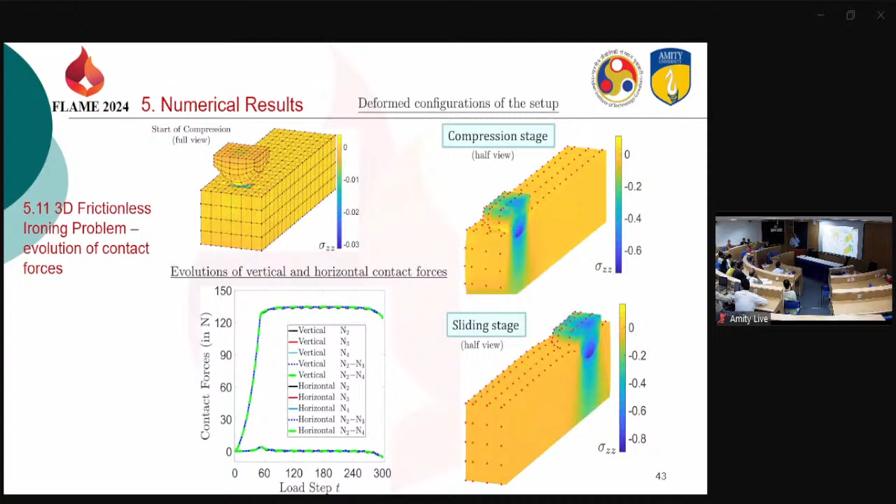This was frictionless results, and you can see the amount of deformation that the slab goes through when the die is compressed and then dragged along. So the way it goes is first you compress and then you drag along, and the results that we get match with the reference results. It comes very nicely, and we had much smaller oscillations as compared to conventional results that people have.

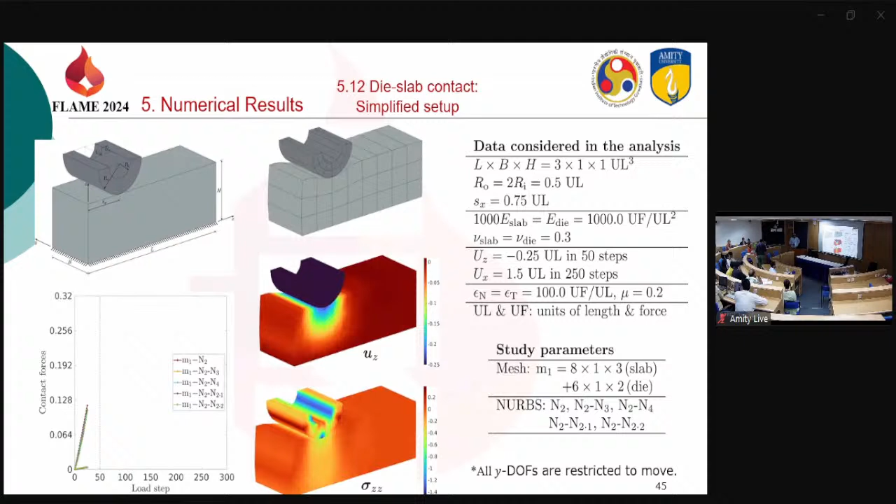Okay, so now we did a series of simulations. This was with friction, die slab contact, which we called simplified setup. It's like a 2D problem only, in the third direction we just extend, and you see that with adaptive VO, with very coarse mesh also, we had very smooth results. I'll just skip all those.

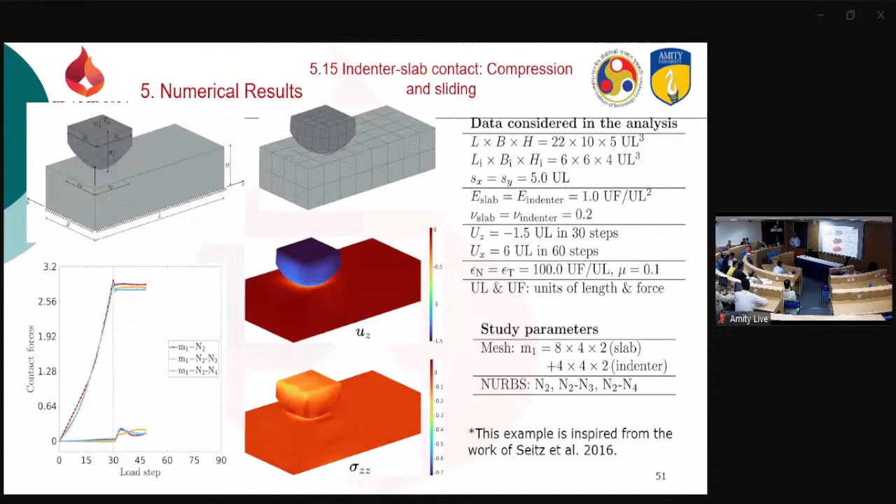So everything was smooth. And then finally what we tried was the die slab indenter with friction. The first case was compression and sliding. Again smooth results. Then we had compression and rotated sliding, where you do the compression and then slide it along with rotation of the die. This is a very challenging problem in contact, and we got very smooth results. This result is under review in the International Journal for Numerical Methods in Engineering.

I hope it gets accepted.

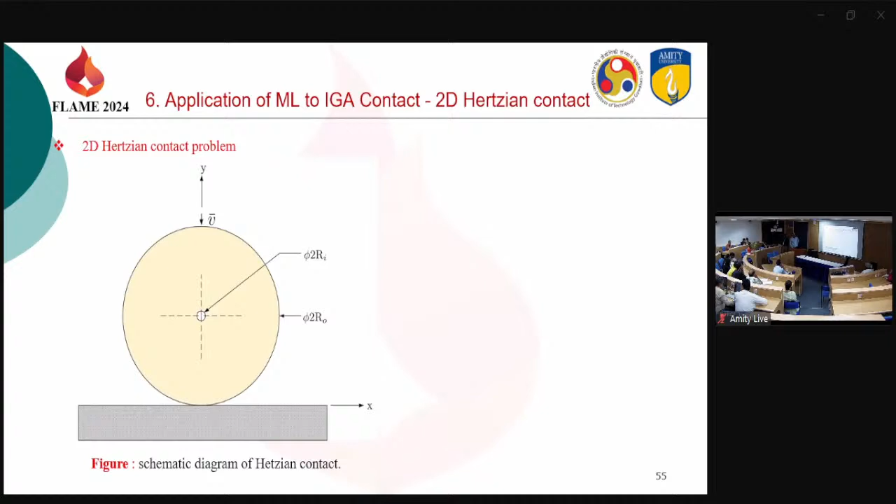These gray zones, and we had a very good match of the IGA results with the DNN results. Obviously, the DNN result takes only 1 second to simulate, while IGA will take around 15 minutes to simulate. So there is a significant advantage in using DNN. But there are some situations where we get more error that we have to explore.

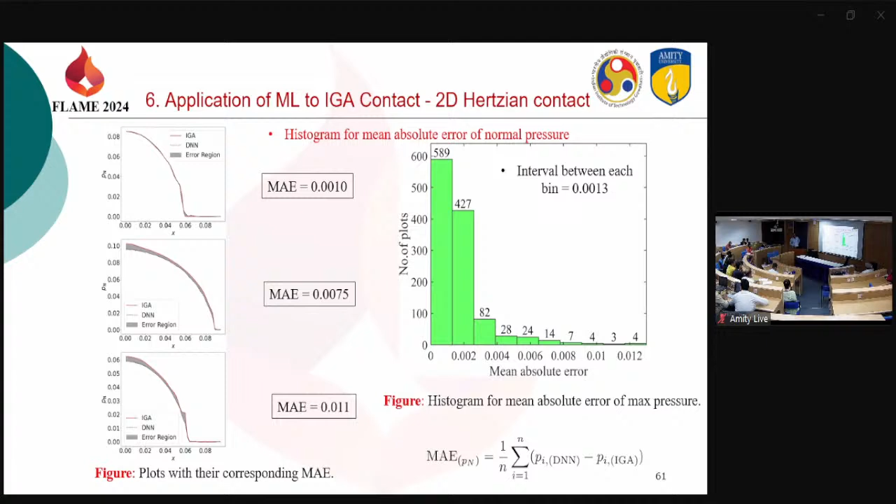So a large number of our results had very low mean absolute error. Only a few had very large mean absolute error. Obviously, with some kind of strategy, we can reduce that. I'll just skip all that.

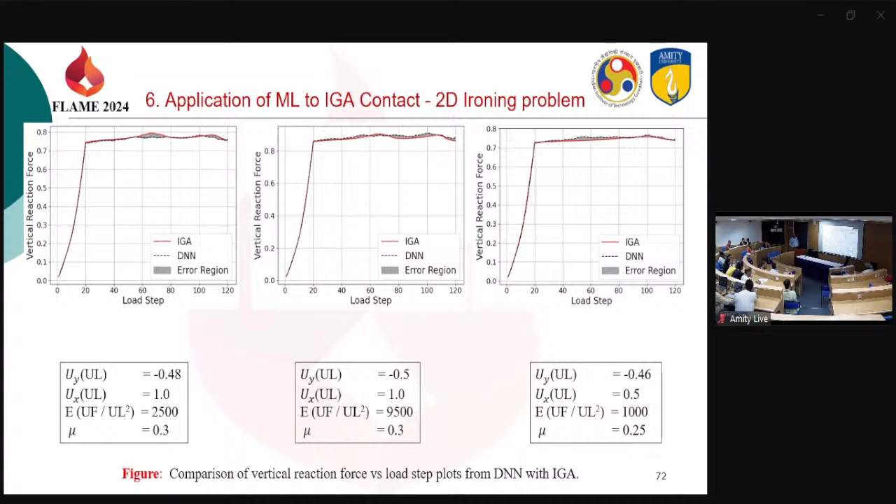And again, this is the 2D ironing problem. This is the vertical forces that we tried to simulate. In vertical forces also, we had good matching in most of the samples, but in some of the samples you get more error. So again, we have to look into where our training data set is not proper. This basically happens when your training data set is not proper.

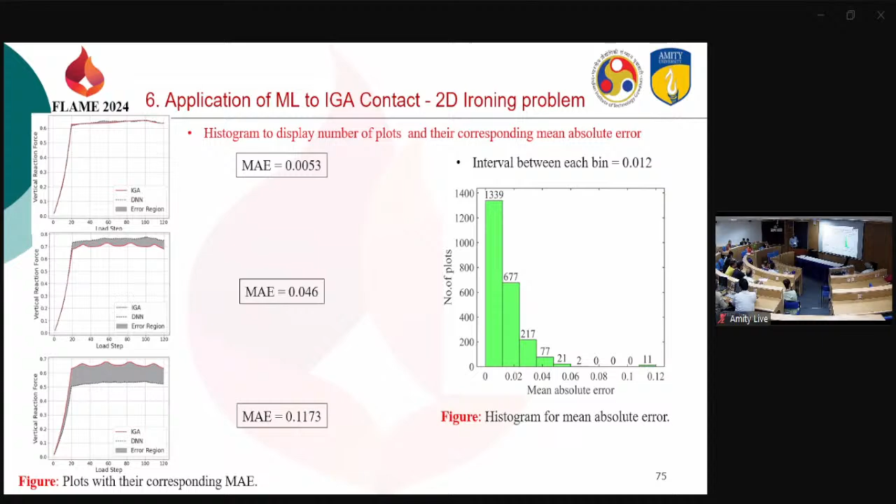But when we look into it, these are the worst results which lie here, and these are the best results which lie here. So for a large number of our simulation results, the mean absolute error is very small. And this I'll just skip.

So what is the future outlook? IGA contact is more accurate, robust and efficient. But you need to have a generalized pre-processor for isogeometric analysis, which still does not exist. So that is one of the bottlenecks of application of IGA in real life problems. You can have adaptive variable order NURBS. That's what we are working on.

Extension to self-contact. That's what happens when you have a crash and the automobile components come in contact with each other. Extending to dynamic impact simulations. Now this machine learning application we have started, but it remains largely unexplored till now. Then we can go for large scale contact problems. In all the problems that we showed, the contact was only at a particular zone.

But what happens if you have contact at hundreds and thousands of such zones? Then you need what is called high performance computing. That's one of the things that my student at TU Munich is working on, high performance computing applied to contact problems. You can apply all those to the biomedical field. That's an area which is unexplored.

And the application of contact to small scale problems, which has applications in robotics, basically space. And multi-body contact problems in robotics. So that's where a lot of applications are there that people have not worked on.